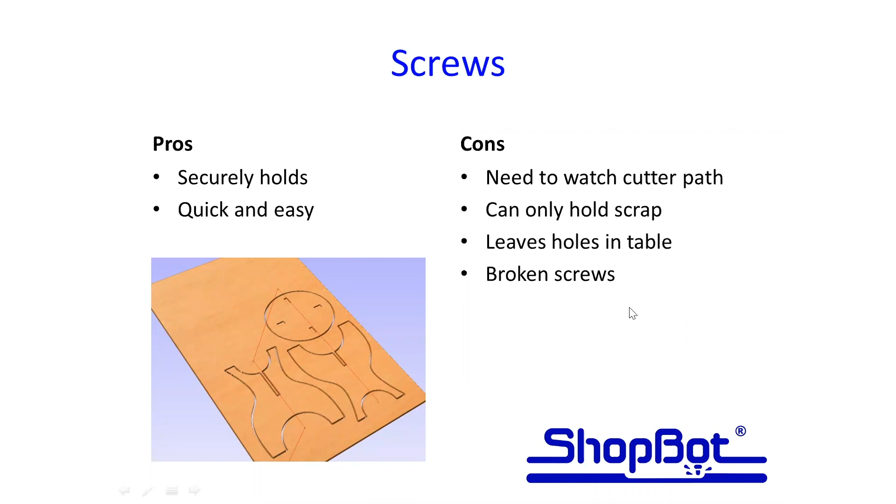So that is screws. Nylon nails - this is one that a lot of people use. I don't like it, a couple reasons. One is I have not had luck with these nails really going through all the way and holding boards in place.

They just kind of bend and compress as they cut in and don't penetrate into the table surface as much as you might think. But if you're cutting material that's suitable for the strength of the nail to hold it down, it's very nice. It holds the boards securely in place, it's very quick and easy, and air is not a problem. It doesn't damage a bit if you do end up putting a nail in the path of the cutter - the cutters are able to just go straight through these without any issue.

Another advantage to this is removing it. Even though I have removing on the cons side, sometimes removing is an issue, but if we use the same method as I showed with the screws - using the CAD/CAM software to place those holes and know exactly where it's okay to put a nail - you could then, after you're all the way done cutting, use the machine in those same hole locations where you put that nail to do a drilling tool path that goes all the way through. Basically you're just drilling that nail completely out.

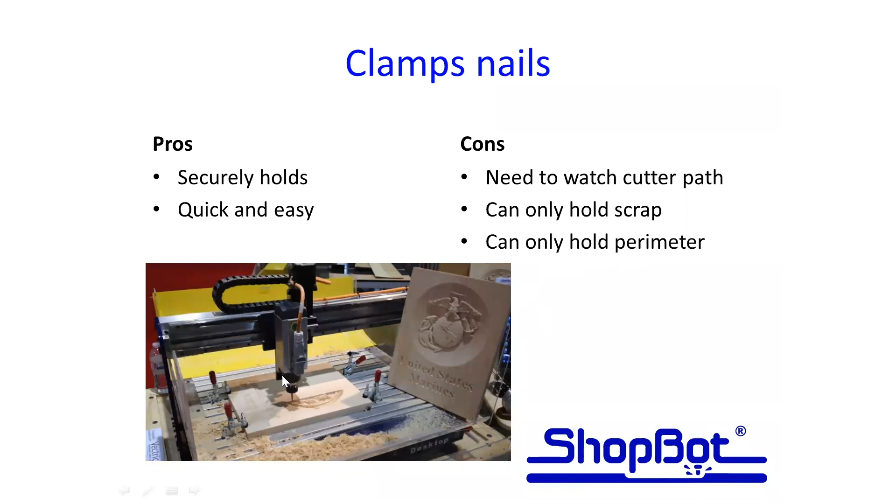You do have to watch the cutter path. Mainly it's off to the side, so X and Y are generally fairly safe since you're not going to necessarily cut that close to the edge. But your Z level - make sure that your Z is up high enough to clear any clamp that you may have on the table. And a big con is it's only able to hold the perimeter of the part and nothing on the interior of the part.

Double-sided tape - this is one that if you've been sitting in on the Wednesday classes, this is one that I also use. Between double-sided tape and screws are my two biggest methods of holding parts in place. The pros is it's holding everything, the scrap and the part itself. It's fairly quick and easy to use. The cutter path isn't really an issue, although when you do cut through double-sided tape, it does kind of make a mess of the bits and gums up the cutter - so that's on the con side.

And you can't really confirm the hold down. So if you have it taped down and your full sheet is there and you press it down and push it, it feels like it's held down, it's not moving, but as you start cutting the parts out you then realize the board was cupped a little bit and it was only stuck on the outside and not on the interior of that part. So that is definitely an issue.

There's also an issue with cutting in double-sided tape of cutting on top of Jello. You have to be careful not to get the tape too thick, which you might think is a good idea to compensate for flatness and such. But once you get it too thick, that tape could vibrate and kind of wiggle and jiggle, which is going to show up in the quality of the cut as well.

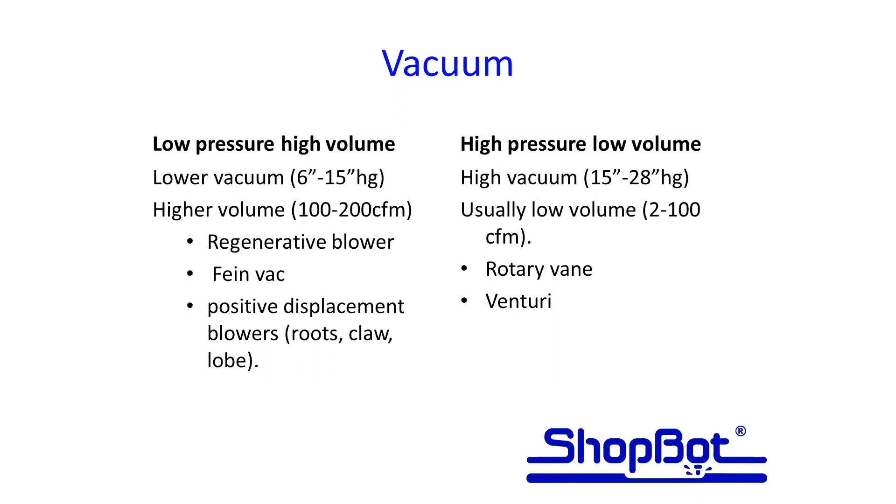You could watch the video of this and dig into it a little bit. Just understand one thing we'll talk about here: what is the pressure, and what is perfect vacuum, and what is it that you want to be able to achieve with this.

Perfect vacuum is 29.921. You're never going to get a vacuum any better than that unless you have your vacuum inside of a pressure chamber that's able to increase the atmospheric pressure. That's also at sea level. And basically you divide that number by 2 to get your pounds per square inch.

And what that is, is a column of air. So one square column of air sitting at sea level all the way up to the outer atmosphere—that column of air is going to weigh 14.7 pounds in that inch. So you could multiply that over a 4x8 table, and you'll find out you could have a couple tons of weight of air pulling down on your material.

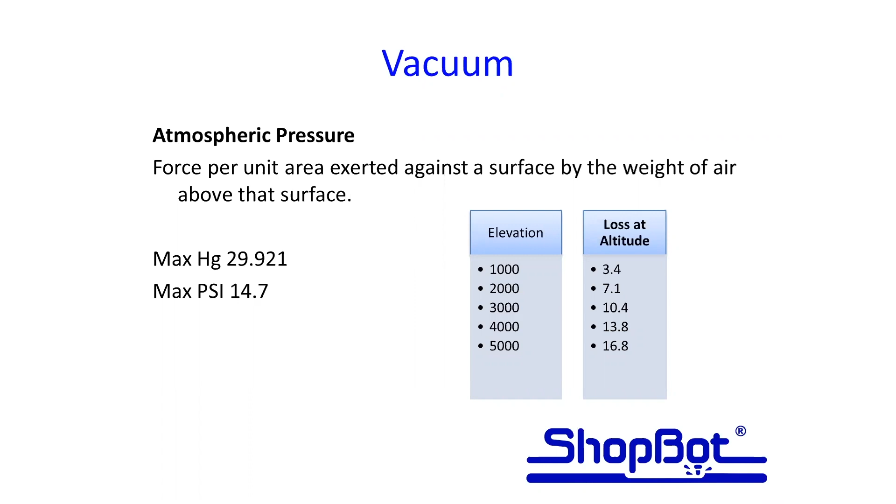So we have a low pressure, high volume system. This is generally like a regenerative blower, shop vac type system, where they're not able to really produce a lot of pressure, but they just move a tremendous amount of air. And that air flowing through here is able to compensate for the lack of pressure.

So the reason I'm pausing a little bit here is I'm looking for a calculator to do a little bit of math. So I'm saying this system is good for a cabinet maker—if you're cutting a 4x8 sheet of plywood, that's a total of 4,608 square inches. A good shop vac, or not even a decent shop vac, is going to be able to get you roughly 5 inches of pressure, so you're going to end up getting about 2.5 pounds per square inch.

So that means if we multiply that 2.5 times the square inches, we have 11,000 pounds of air sitting down on top of that plywood. So even though it's just a small little shop vac, that's a lot of weight we're applying to the top of our material, the top of the 4x8 sheet, which will hold parts in place.

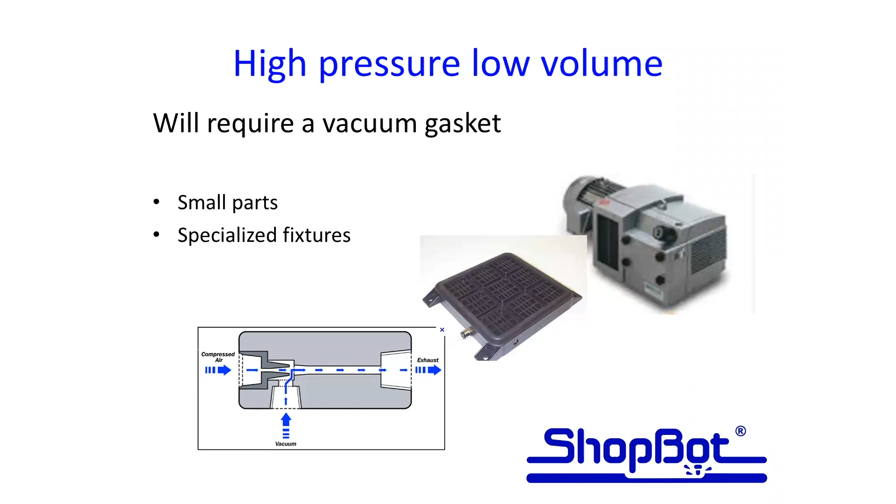But then we also have the larger horsepower rotary vane pumps, like the larger Becker pump, where that's also high pressure—it's able to achieve 25 inches, but we're also up at 150, 200 CFM. So that's like the best of both worlds. But the higher the volume, the higher the pressure, the higher the price. So a good solid rotary vane Becker pump, I believe, costs around $7,000. So there is some of that, but it's a very, very nice pump to use.

So with the vacuum, the pros is it's going to hold it securely and evenly. That's really the most important part and the biggest advantage of vacuum, holding the material, your scrap, and the whole sheet evenly. The hold down is consistent across it, which is going to show up and give you a good quality cut. After I get through this, I'll mention a personal experience failure I had that demonstrates the security of the vacuum.

It's very quick and easy. Just throw your sheet up there, turn the vacuum on, and it's held in place. It can also hold the scrap part, because holding the scrap is something a lot of people tend to forget or not completely understand. It's just as important to hold your scrap material as it is to hold the part you're actually cutting.

Because if you don't worry about holding the scrap, it's going to be bouncing and vibrating around on the outside of your part, which vibrates and bounces into the cutter, which will then resonate into the part you're actually cutting and most concerned about holding down. So holding scrap down is very important to remember.

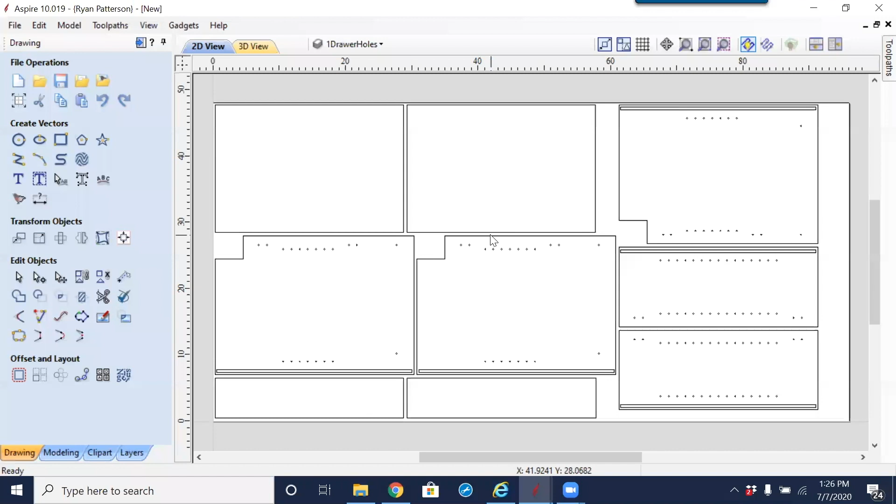So with this scenario here, in cutting order, looking at this I would probably cut 1, 2, in this order. So there's 1, 2, 3, 4, 5. Now these parts here are 6, 7, 8, and 9. We have ways within Vectric to say I want to cut these parts out in the order that I have selected.

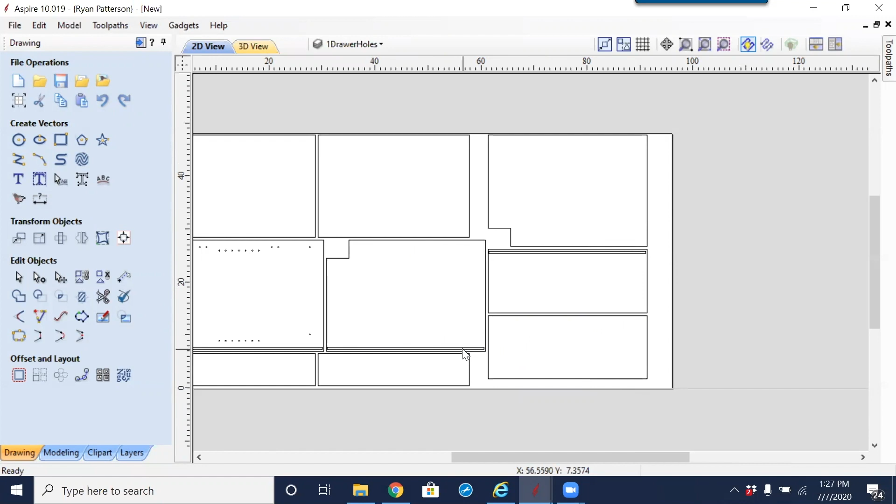Let me clarify and take out some of this noise - I'm just going to select all of the internal features and remove them, because we're really only talking about hold down and methods for being able to perimeter cut without a vacuum. So I've removed everything internal and I'm only going to focus on a profiling toolpath on the outside of the selected lines.

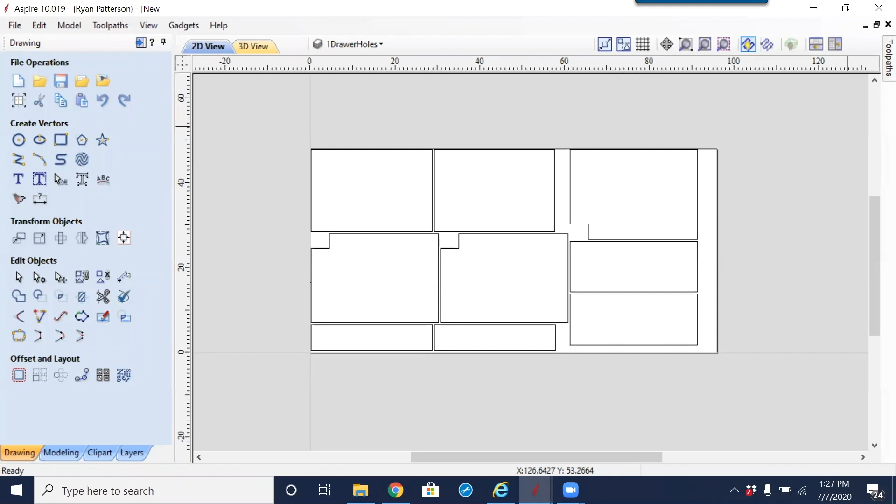Normally we don't worry too much about where the start points or end points are - well, we should worry about what direction they are - but the part order doesn't necessarily need a lot of time. So typically, just select everything, bring up the profile toolpath, give it a depth to cut to, and then specify a cutter, which I don't fully have my database set up for yet.

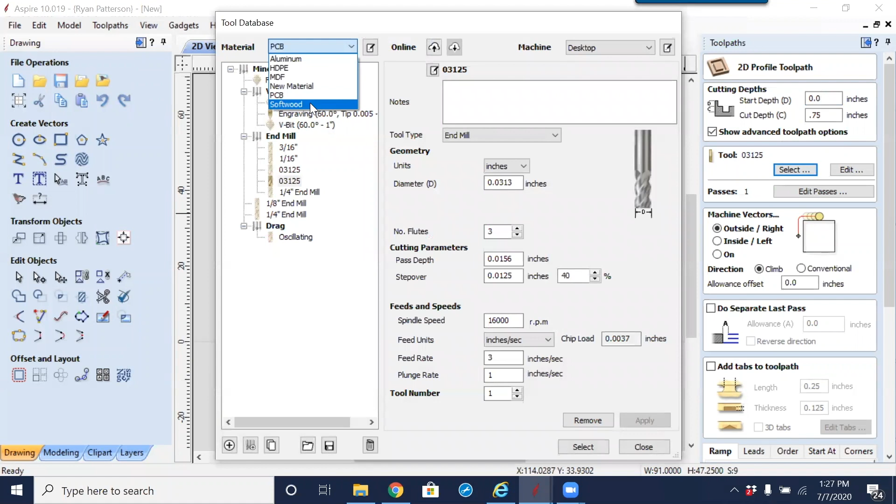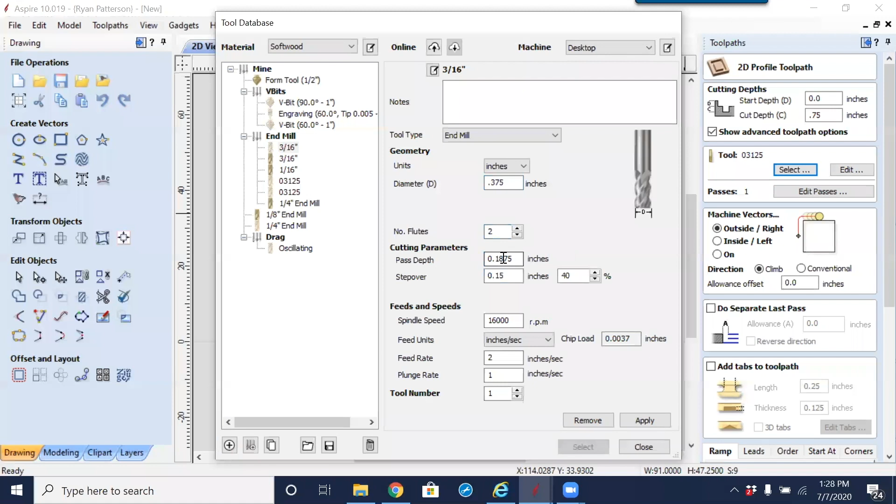Well, let's put a new tool in here. I want an end mill because I need to do it anyway. So bonus, we'll learn and see how to enter in a tool, although I'm not going to speak too much on the settings here. We'll see that as you move along.

I'm setting the material to softwood, which would be like plywood. So I'm entering in the numbers and values that I would use for cutting plywood.

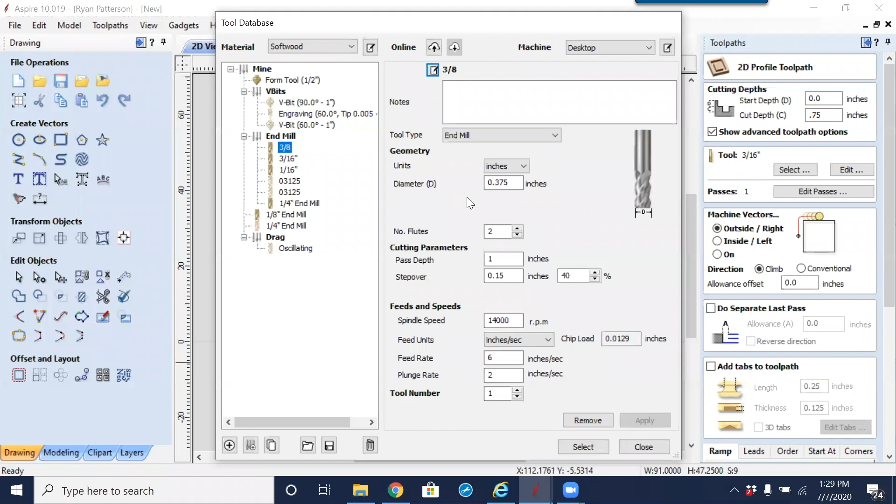Oh, look at that, I messed up. I'm going to select that again. It is in there, but it is not a 3/16 inch bit. I want to edit that and change it to 3/8, so the description actually matches what it is.

Cutting on the outside, I'm not going to worry too much about any of this just yet. I'm just going to come down and hit calculate and see how the path looks.

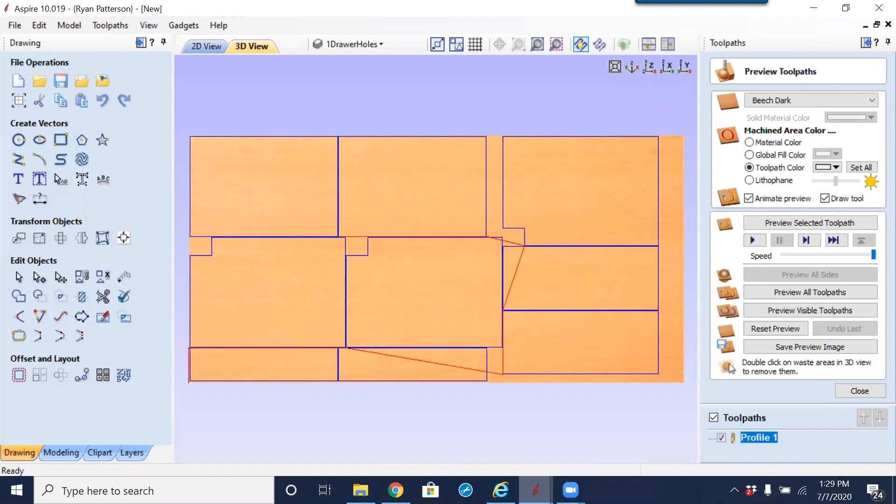So yeah, sorry, I should have mentioned this. There was a question about the vacuum hold down being able to bleed through MDF, since it's a porous material.

I didn't believe it, so I actually called ShopBot - this was 15, 18 years ago - and asked why they wanted me to cover up all this hard work I just did. They explained that MDF is porous and it'll bleed through. I said alright, I'll try it, and sure enough it did. At that time I was just using a shop vac, so even a small shop vac or powered machine is still strong enough to bleed through and pull through MDF. So yes, it definitely can be done, and that's the way it's done.

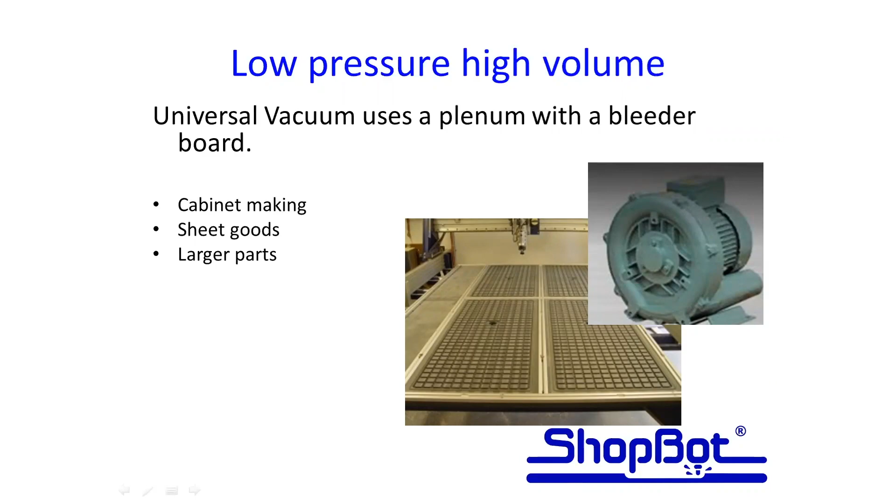Actually, cutting on top of a waffle iron grid like this hurts you in a vacuum. A lot of people think you get a better hold down if you just threw your board right down on top of this, but when you cut all the way through, you cut into that grid a little bit. You could always fix that, but what it really does is allow more of a leak and a more direct flow, so you can't build up even pressure across the table - you lose all the vacuum and airflow through that one spot. So yeah, it definitely bleeds through the MDF.

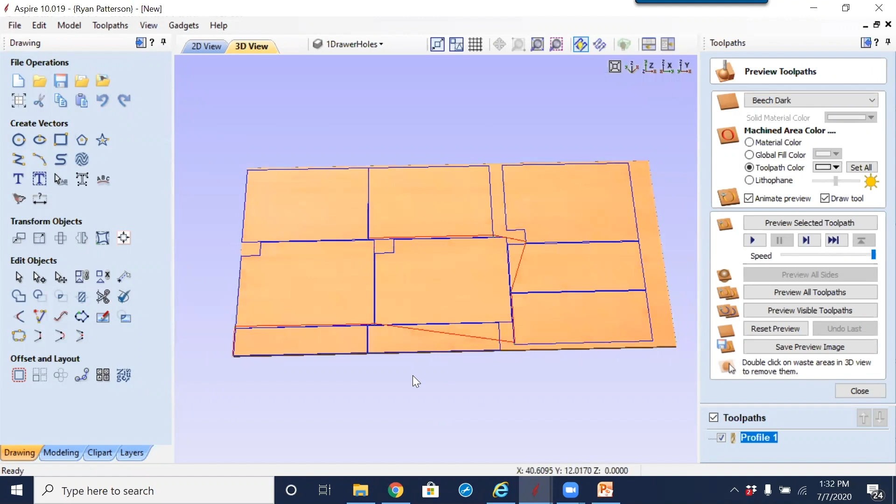So I'm going to take a look and rotate this around and follow how the cutting is. It kind of looks like it's cutting in a decent pattern that I would already want. This was an imported drawing from another software, and it looks like it did a decent job of putting the start points right where they should be, except for this one right here.

I don't like the location of that, so I'm going to explain what I'm talking about here. Coming over to the 2D view, I'm going to uncheck this and look at the strategy or the path here.

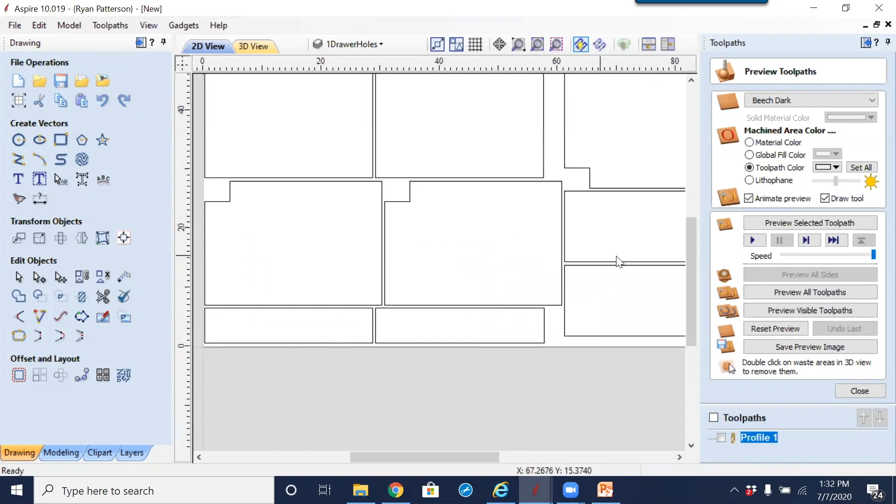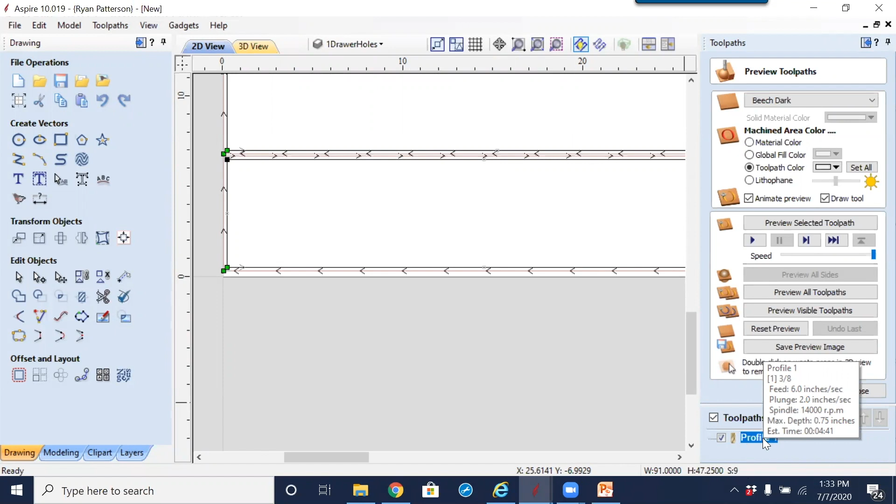If I select everything and type the letter N, node editing is turned on. And actually, it's not good at all - we are cutting in a conventional direction, and we can see that by what this arrow is pointing to right here. That is... oh, I lied, that's a climb direction, which is not good for plywood. So I'm going to double click the profile here and change the direction to conventional.

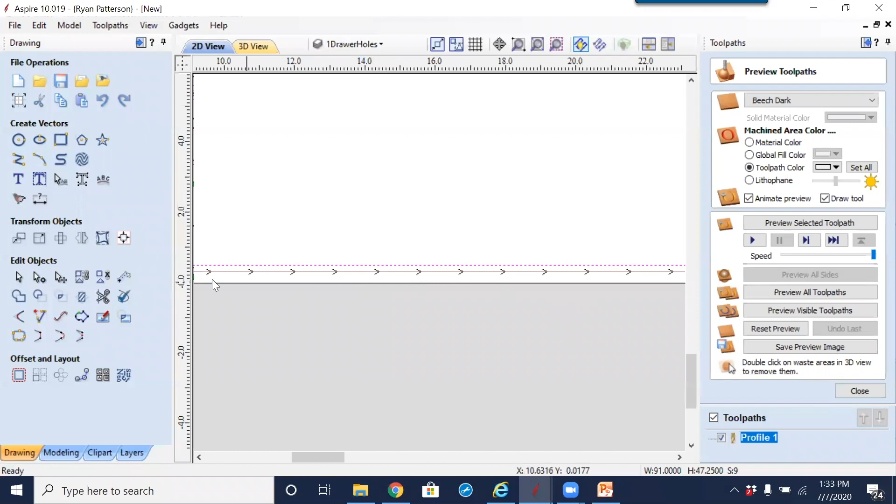Select recalculate, and again coming over to the 2D view, the arrows here are showing the direction of the cutter - it's going from left to right around the outside of this part. Now imagine if we're cutting this part with solid hold down across the whole sheet, as we hopefully just learned - there's a lot of weight sitting on top of this board. But if we start cutting right here at the lower left and work its way up and over, when it gets to this point, we still have some cutting to do from this point down.

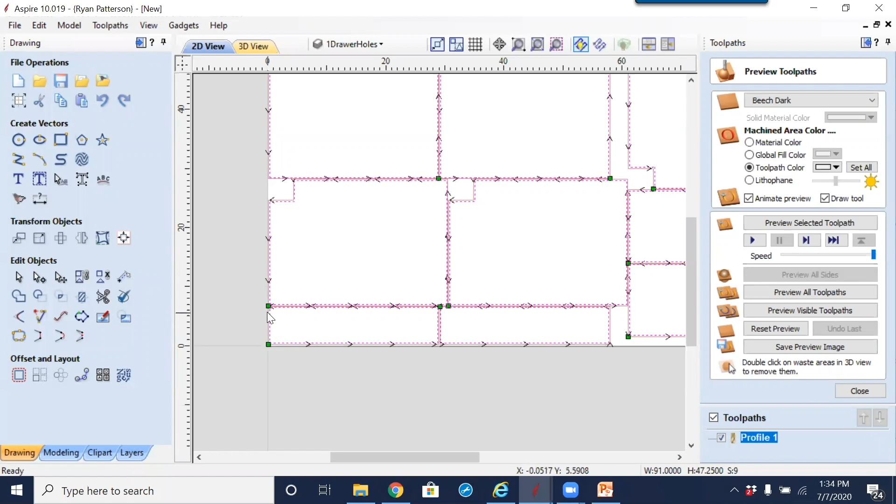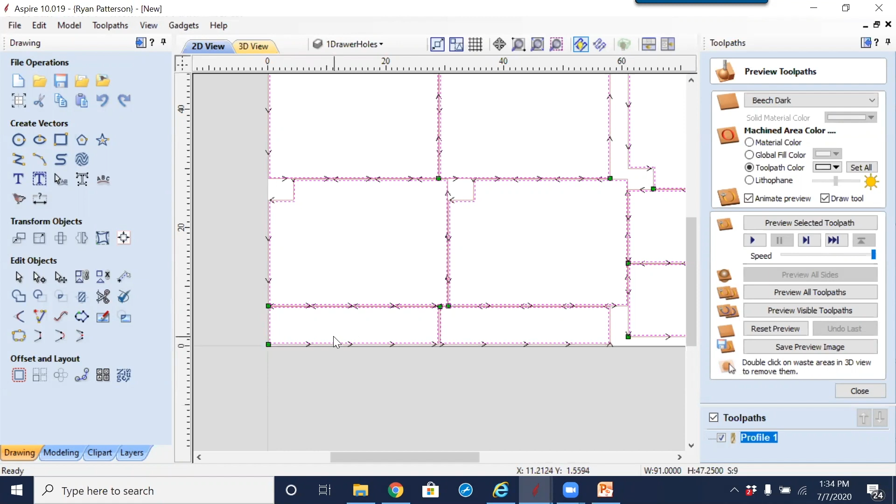Well, now at this point, there is nothing holding. We've completely disconnected this part from the rest of the sheet. So there's a very strong possibility that this part is going to shift as it's making a 3/4 inch single pass down through this area. Vacuum will probably not hold that part in place by itself.

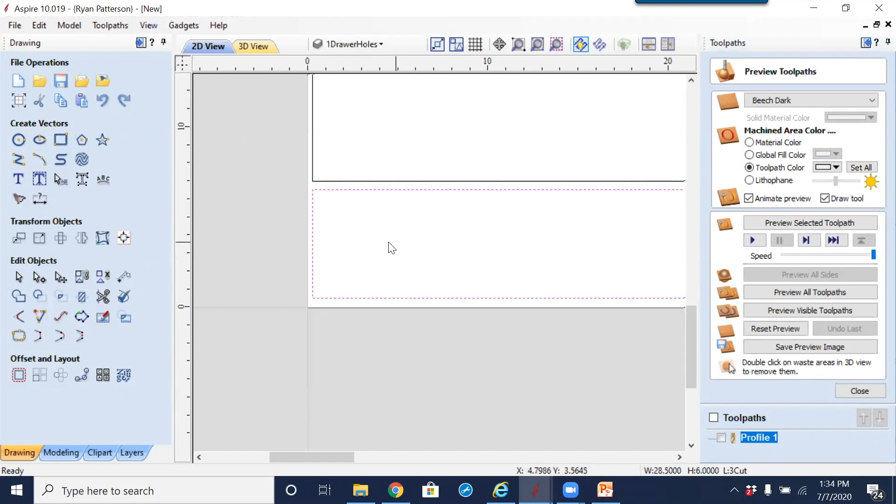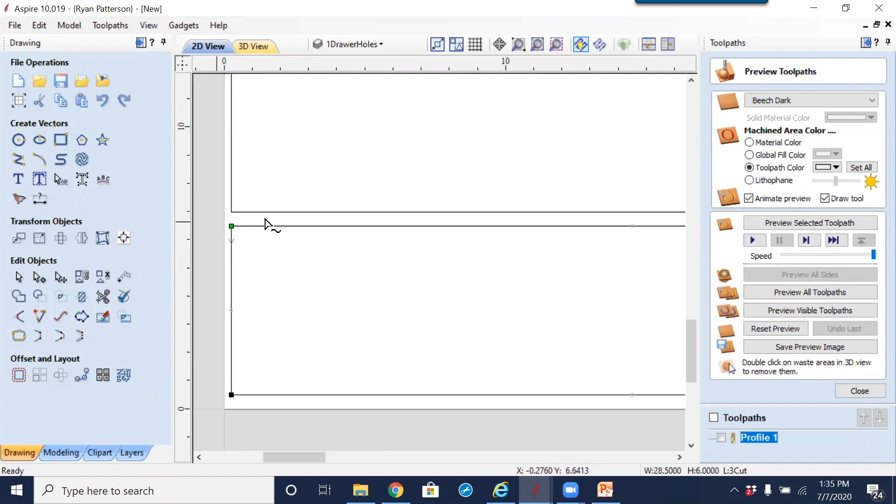But if we change the start point from this lower left corner and move it to the top left, we'll probably be all right with this one, because now I'm going to node edit this one here. As it's cutting here, over, up, and as it's coming across here, this part is still connected to the larger part of the material, so it can't move. The only time it could possibly move is when it makes this final connection back to the start point.

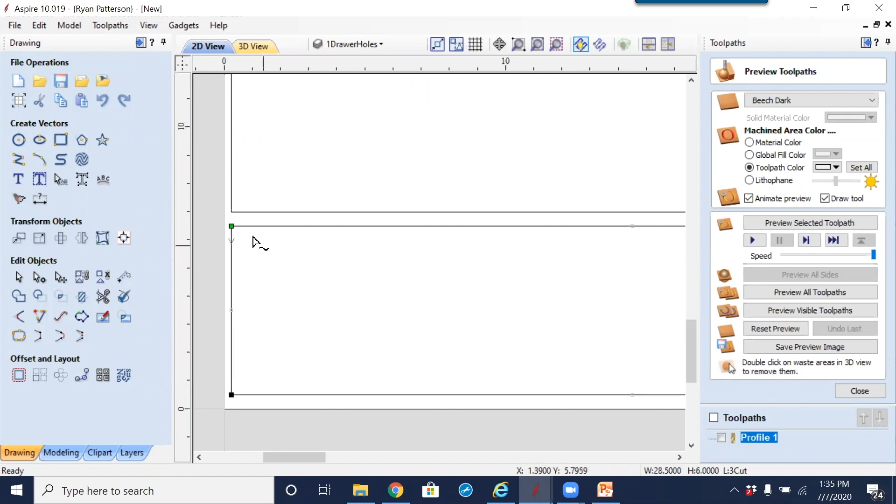What would happen is it's not going to get kicked off the table. It's not going to go flying across the shop. It just kind of gets a little bit of a shift, bounces off a little bit, which may end up leaving a little bit of a radiused end right there, but we're moving fairly quickly through this material. So even if it does kick off to the side a little bit, it's probably not doing any great damage to the part. If anything, we're leaving a little bit extra material there that could be sanded off.

So I'm just going to go through a couple of these other parts, selecting them individually one by one and changing the start point. I'm changing the start point by hovering my mouse over top of where I would like to have that start point be and selecting the letter P.

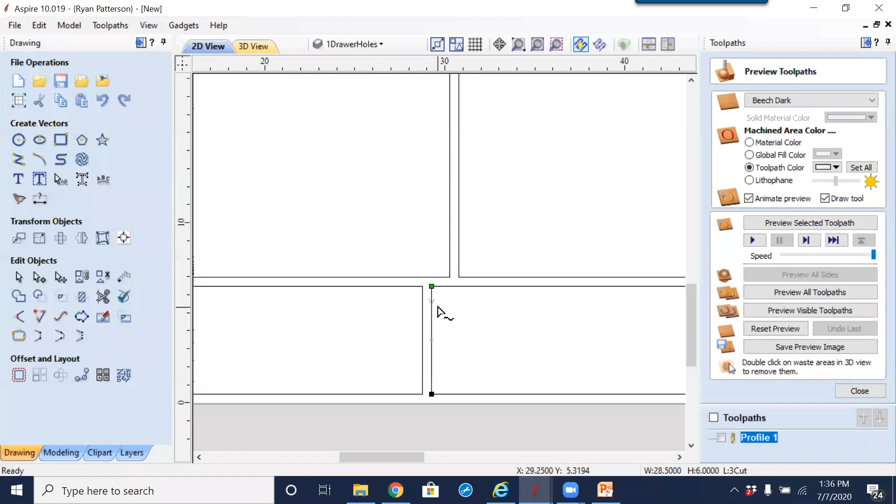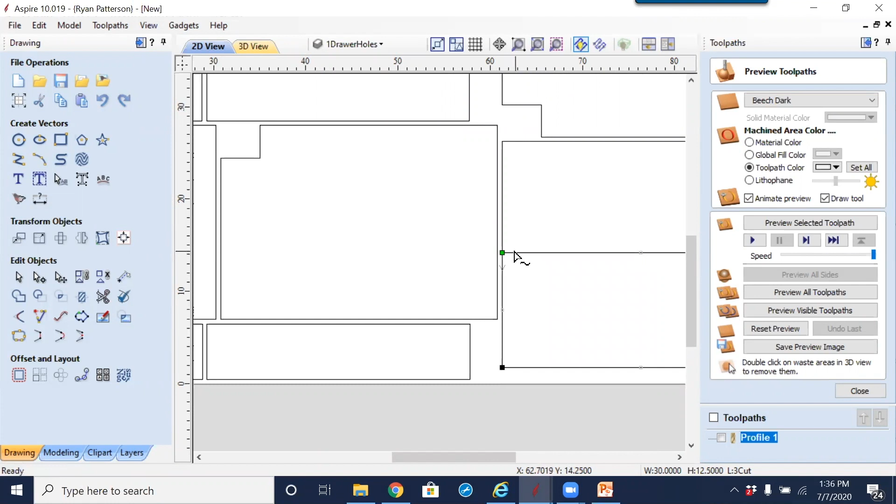I'm going to go through the process in the order that I would want to have them cut. And I know it was the letter P for that start point simply because right-clicking and saying make start point, you see this letter P right there. So that is saying that that's a shortcut to that letter or to that command.

So knowing the shortcuts really are going to speed this up a little bit.

Now this part here, even though so far I've been going to the upper left, this part I'm going to go to this lower left point right there. Same scenario - it's starting here, working its way around, up, over, and as it's coming down here, it's not completely releasing its hold down or its attachment to the rest of the sheet, which still has a very solid amount of surface that that vacuum is holding in place. So we're probably good with that one.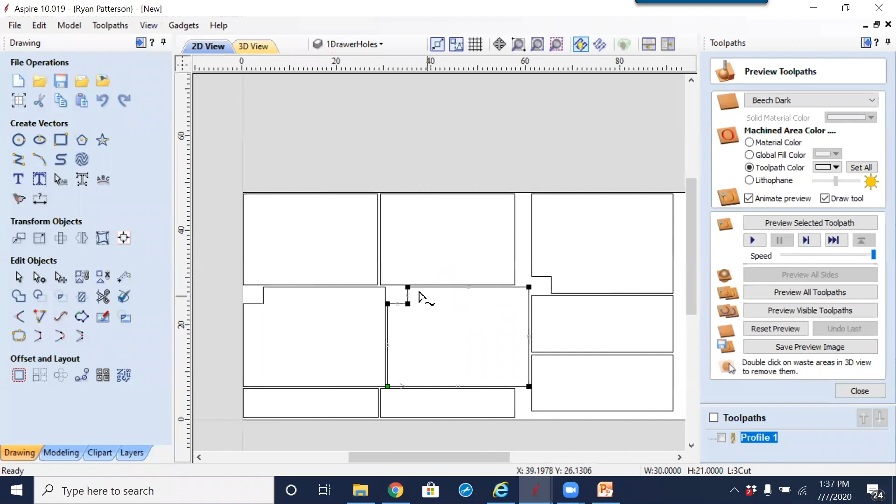Again, just coming down here, changing the start points on these parts. And again, well, look at that - that one's already right where I would want it because it's going to come across, up, over, and down.

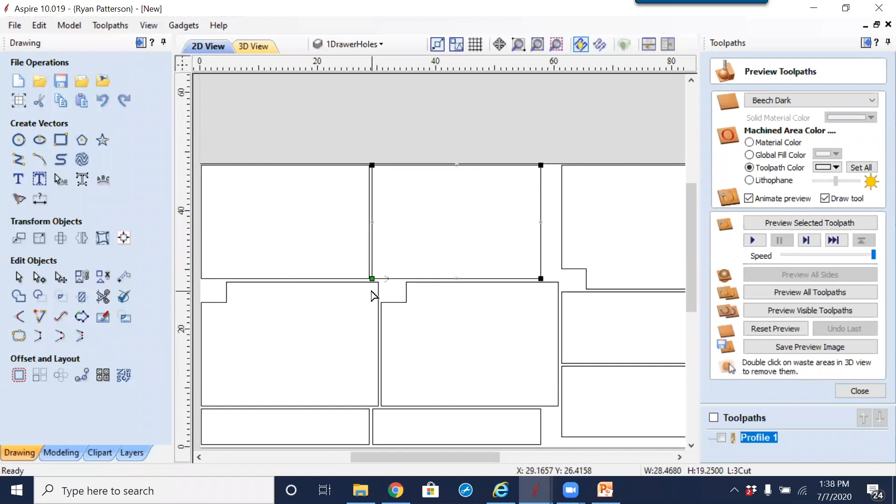This last part really doesn't matter, it's probably just as fine there as it is over here because everything is already removed from it. But I will change it to the lower right only because this part is at the lower left. So it's up, over, down, and saves the machine from a little extra travel, which is going to be a little bit more efficient on your cutting speeds and getting the job done.

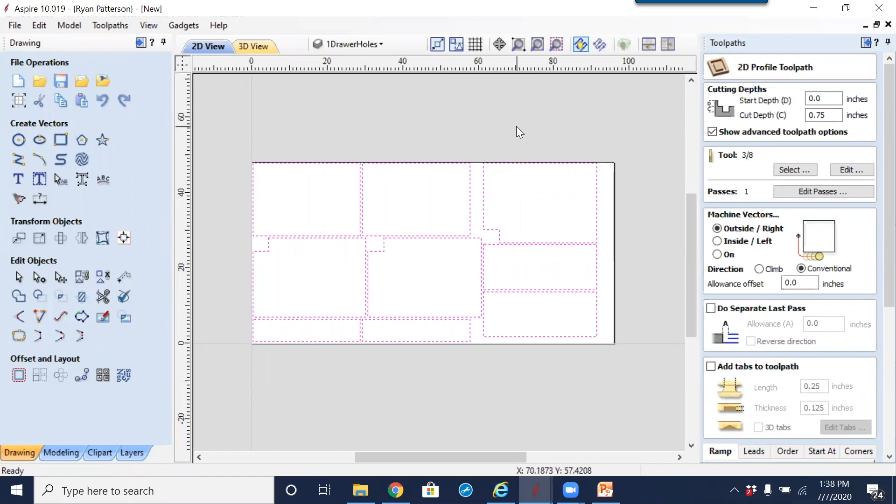So now with the start points changed, I'm going to take a look at the features or the settings within the profile toolpath itself. I'm going to double click. I'm going to deselect simply by clicking off of all parts. And I'm going to take a look at some of what we have.

First, you will want to have the show advanced toolpath options checked, because what we see is only going to be available with the advanced features, and that gives us a secondary tab down here. I'm going to look at the start at, and first we want to keep the current start points - all of those points that we just made, that's what I want to have. The order...

I'm going to uncheck everything here and check the box. It says vector selection order. So that means that whatever part I click on first or select first is going to get cut first. So I'm not going to do a sweep select - instead, holding the shift key down, selecting the parts in the order that I would like to have them cut.

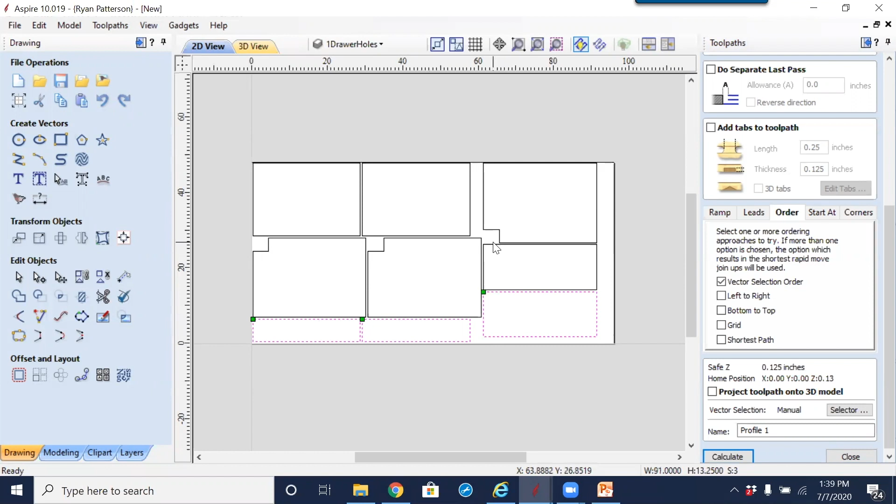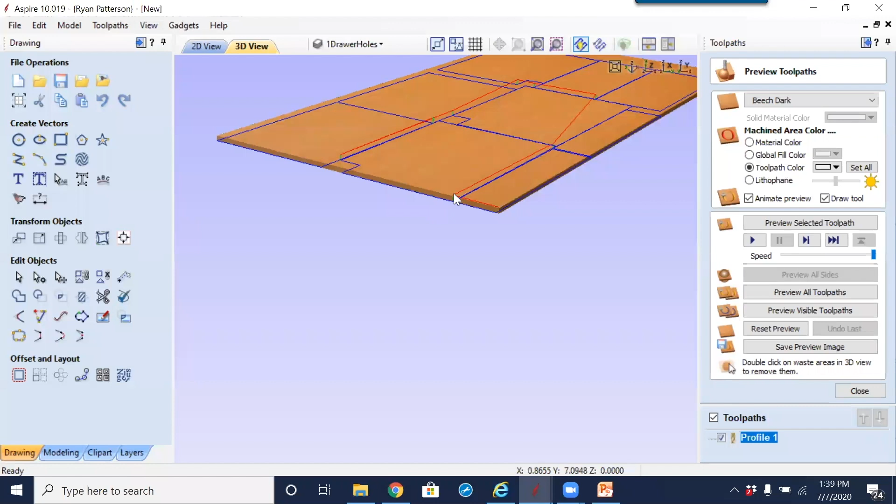With that complete, selecting calculate, we can now see that the plunge points are right where we set them, and the pattern of cutting is going in the order that we have selected the parts. So even if you don't have a large vacuum system, I would very confidently be able to cut this sheet of plywood by going through the strategy that we just did.

I would very confidently be able to hold those down with a basic shop vac from one of the hardware stores. You will eventually burn up that shop vac because that type of vacuum is not designed to have airflow completely blocked off. But for 50 bucks, you could really set up a nice vacuum table, and that 50 bucks shop vac may only last you 1-2 months, maybe 3 months for the price.

It's an awesome hold down, and you will be able to hold them down in place with something like we just showed. And that's all cutting in a single pass without any issue.

Now, there is a case where that last part that we cut, if you are at all concerned about this part being held down with the vacuum, where these two parts alone, I am not certain a shop vac style vacuum table would be strong enough to hold that down.

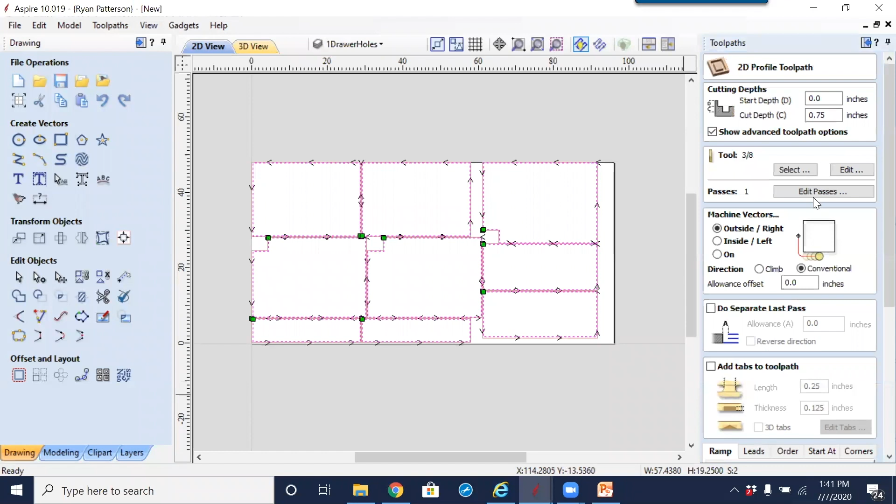This is where we could add the advantage or the strategy of onion skinning. So far through all of these parts that we just cut, we cut at a full depth all the way through, should really be at 0.76 or 0.77 there. This time, I'm going to deselect these two parts right here.

And come down and calculate. So they are still cutting in the same strategy in the start points there, but now I'm leaving this open to be able to take a different strategy on these last two parts, because if you are concerned that you've seen this part slide and move around a little bit, so you want a little bit more surface area.

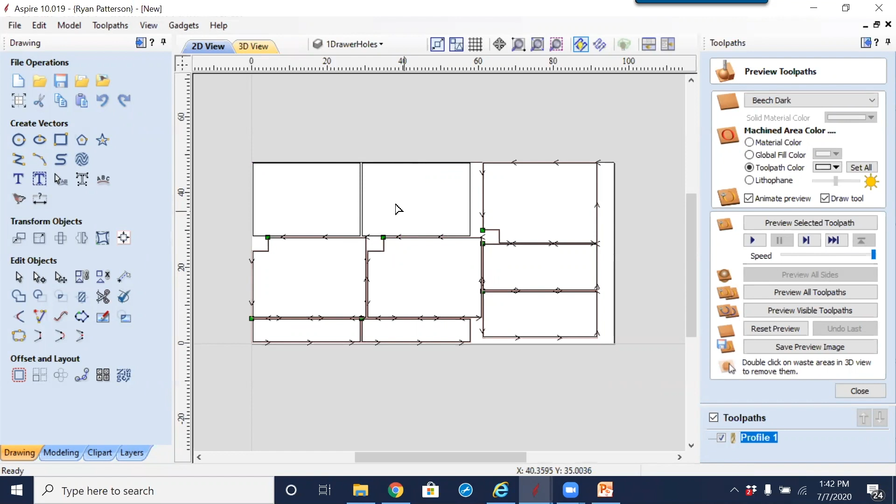The strategy we're going to use here is a combination of what we just did, still going with those start points, keeping where they are, and also the cutting order. So this one first, then this one. I'm going to do a profile toolpath, this time going almost all the way through, not all the way through, but almost. So let's go 0.73 there.

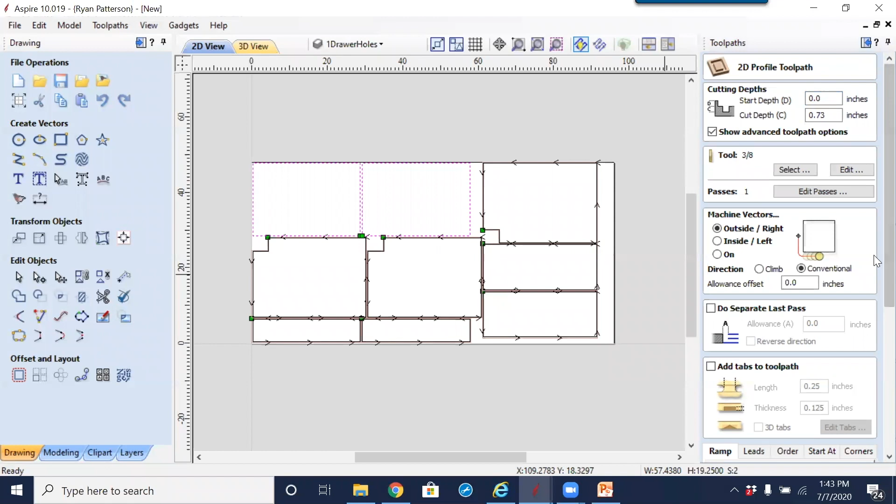Still 3/8 cutter, I'm just going to do that in a single pass on the outside and come straight down to the bottom, making sure that our keep start points is there and our vector selection order is good. Selecting calculate. So I'm going to preview what this looks like.

So you can see all of these parts here are cut all the way through, but these ones are not. So since we did not cut all the way through, we still have a very solid vacuum hold down across the surface of both of these parts.

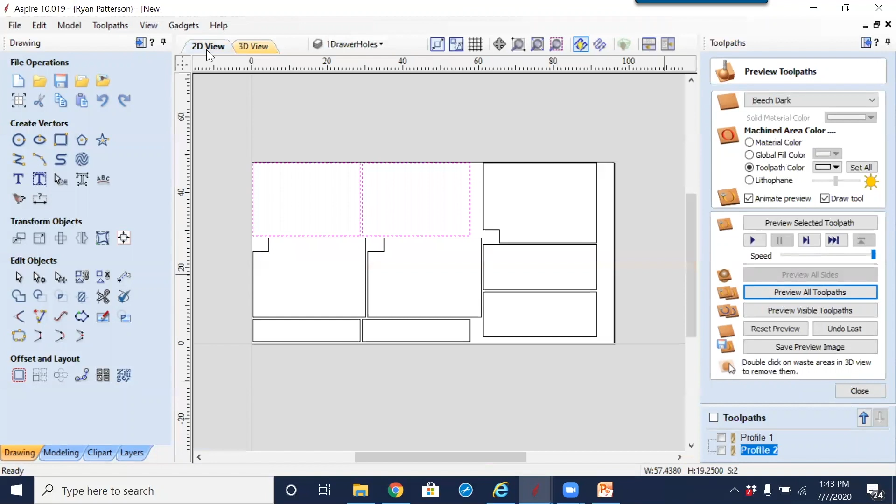Now what I would do is make a duplicate of that toolpath. This one right here is cutting those two. Go right click and duplicate, modifying only that toolpath.

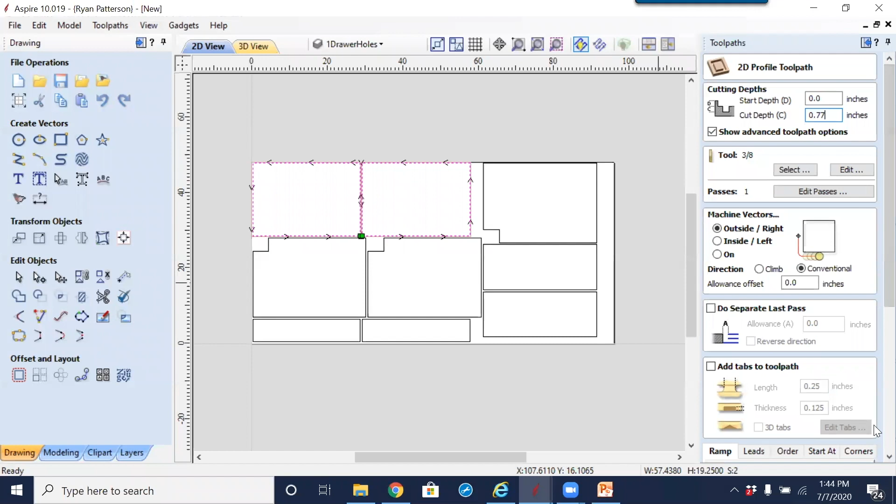And this time I'm going to say, I am going to cut all the way through at 0.77, same bit, still a single pass all the way through, cutting on the outside, same strategy as before, and selecting calculate. So now what that is done is we've removed most of the material with that first pass.

And left just that thin material there that's still keeping the vacuum underneath of both of these parts. Then we come through and remove that onion skin, which at this point now there's very little force being applied to our parts, so the hold down does not have to be as strong.

And removing just, we left a 32nd of an inch or 1/16 of an inch of material there to cut through, and gravity alone or the weight of those parts may even be enough to hold it in place. So it really wouldn't take a tremendous amount of hold down to be removing just that 1/16 inch onion skin of the plywood.

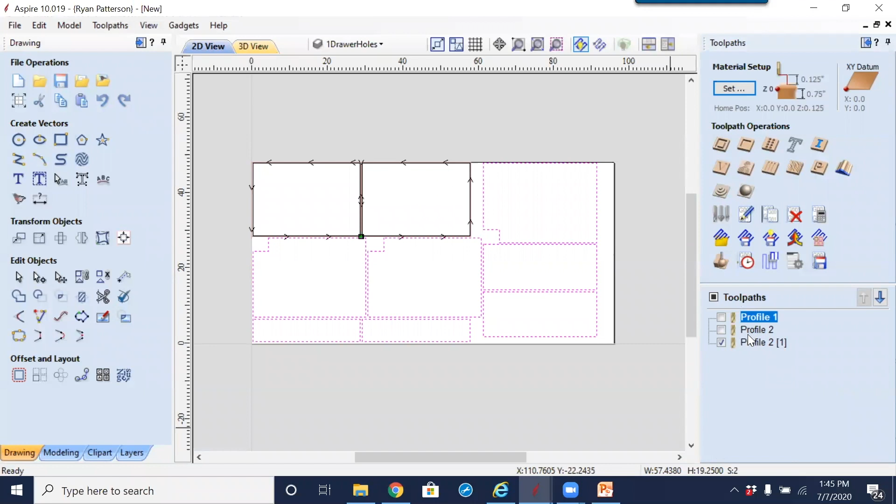Could do that same method across the whole sheet if you really were concerned about doing that. So we could just right click and remove or delete, not all, delete that one and delete this one.

So now we're still back to this one, double clicking the toolpath, selecting the other two parts. I'm going to change the pass depth to this to be 0.73. We'll calculate.

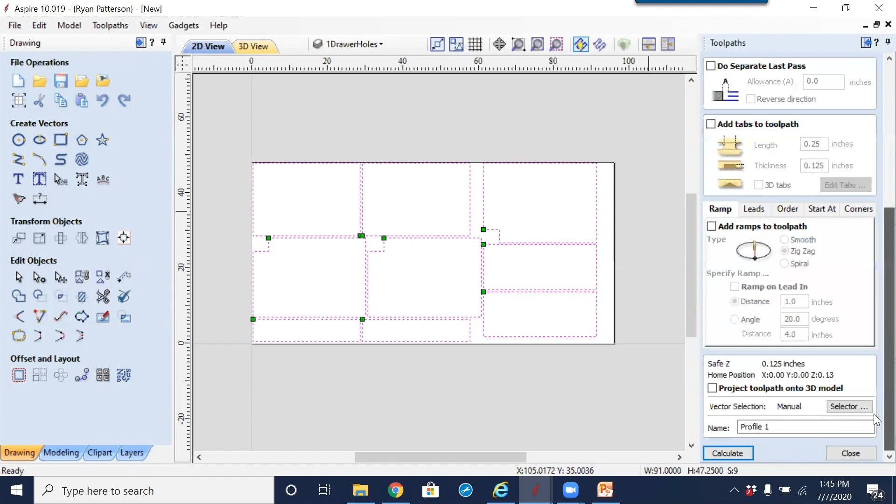I'll reset, so we cut this completely around, almost all the way through, leaving an onion skin. Then we'll make a duplicate copy of that part.

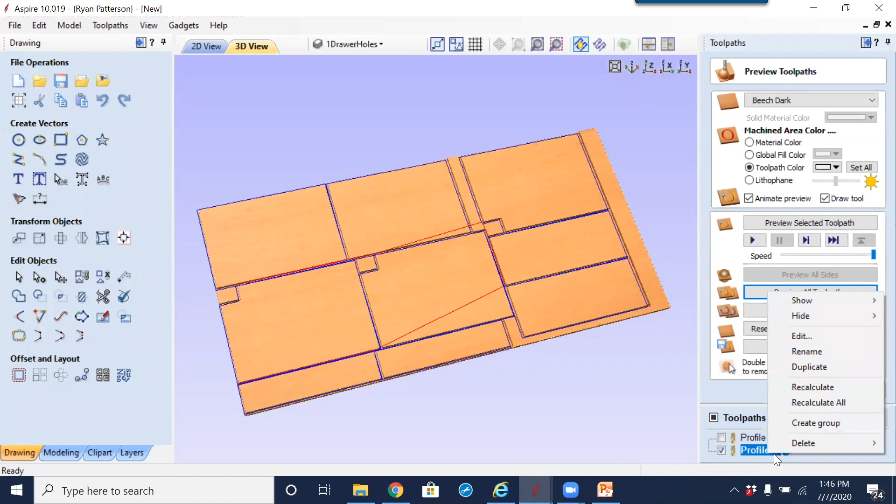We're modifying this one to cut all the way through this time, removing that onion skin, and selecting calculate. So it will cut almost all the way through with the first toolpath we created, then the second one will come through and remove that onion skinning.

I did want to talk a little bit about nesting and what nesting is. Nesting is optimizing parts to fit as many as possible on one sheet of material. There are videos on this already, so we're not going to get into a big discussion now, maybe another session specifically on nesting, but I believe it's fairly straightforward.

One thing I do want to mention is computers are not the best at thinking. They do not think, they only do what we ask them to do. For the most part, if you had time to manually lay these parts in place, you as a human could most likely lay them out with far less waste than a computer. But it's going to take you a lot longer to nest them than the computer would.

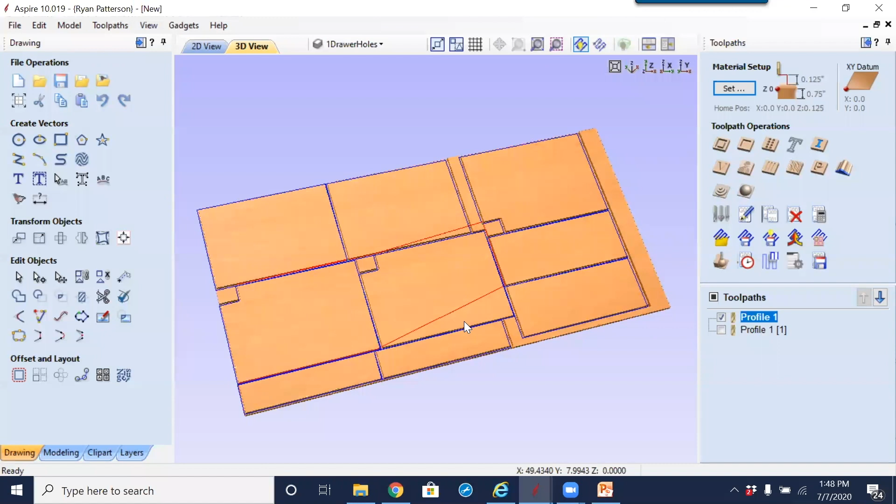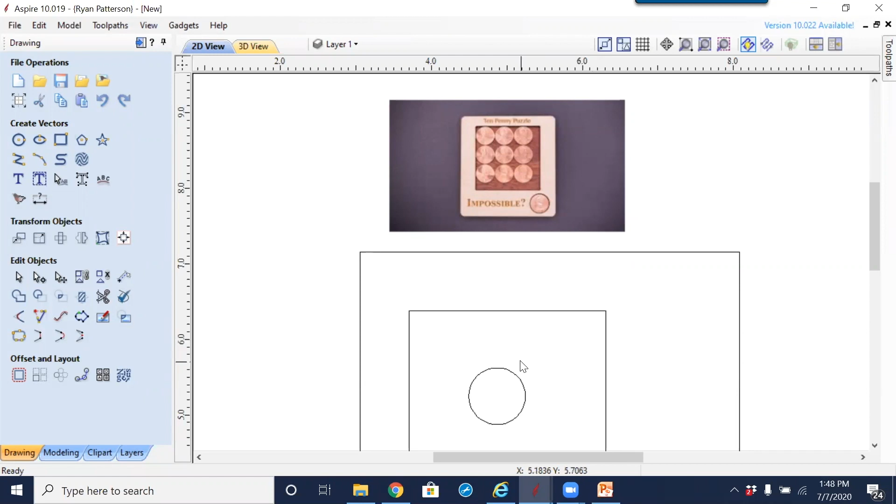A few weeks ago, a month or so back, I posted this project on a Facebook group, you may have seen it. It's a little penny puzzle that illustrates the way nesting could work. The idea is you have a pocketed-out square of material and a total of 10 pennies. 9 pennies easily fit within this area. The goal of the puzzle is to get all 10 pennies to fit within this rectangle. I'm showing this because I think it's a good example of how and why computers may not nest as well as we can.

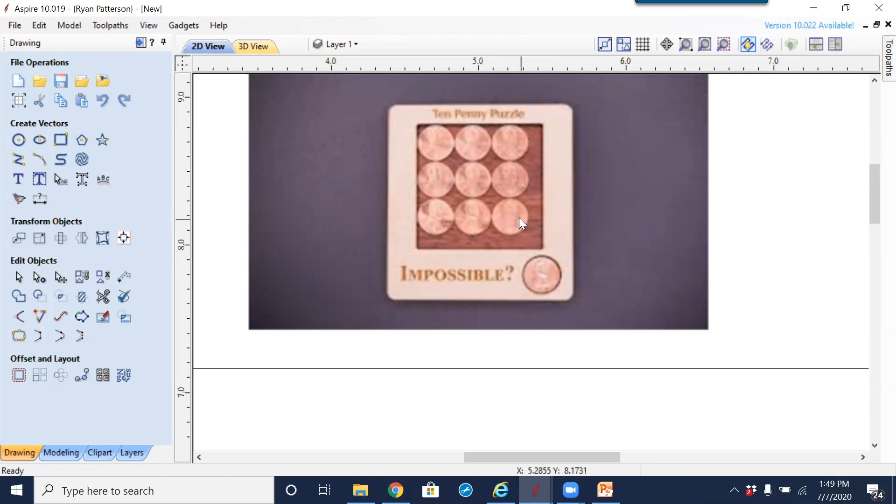It is possible. I won't give the solution away, it's not here, but it's definitely possible, I've done it. Again, it's a pretty good example.

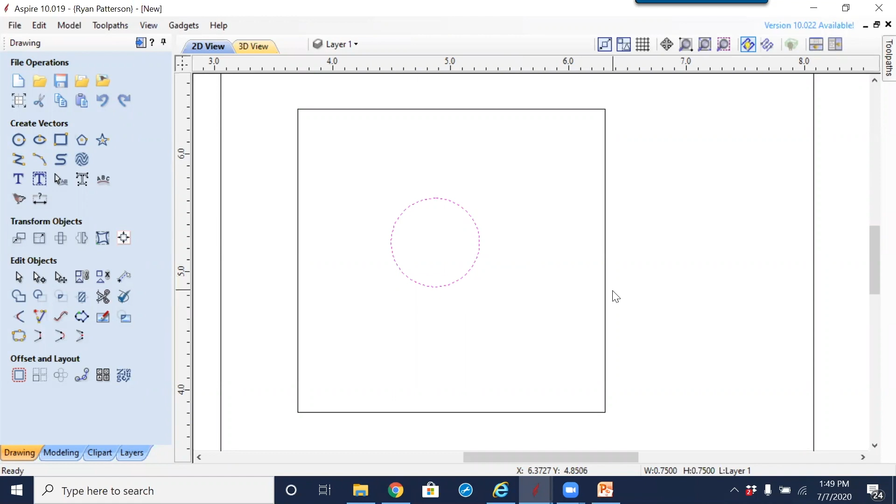I can't remember exactly which Facebook, one of the ShopBot Facebooks, it's up there. I just had to recreate the basic penny setup since I couldn't find my original, but I believe a penny is 3/4 of an inch in diameter, and the outer square I have here is 2.6.

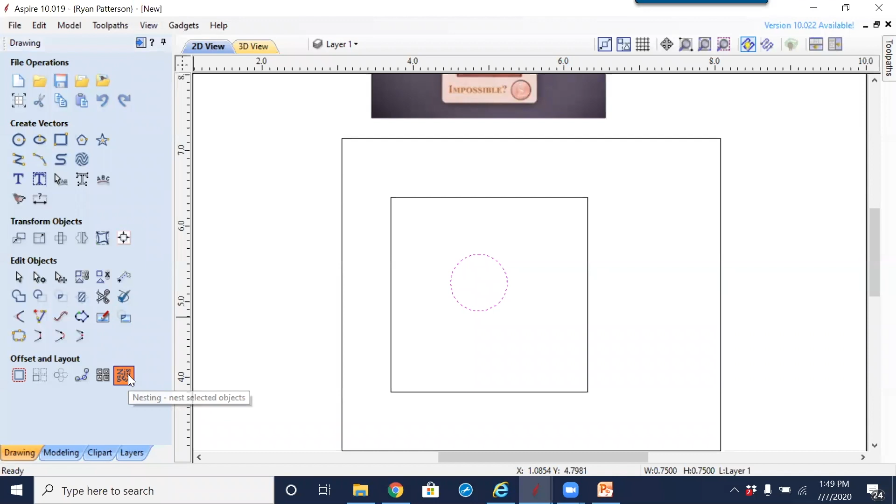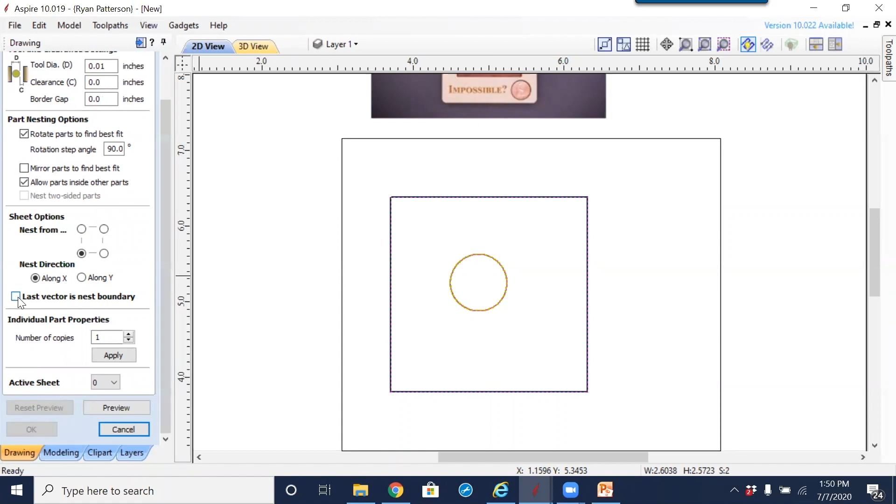So I'm going to attempt to have the computer nest this. We select the penny, then go to the nesting offset and layouts under nesting. I've already made the number of copies, selecting the penny and telling it I want 10 of these pieces, and also telling it I want it to fit within this vector here, by setting this checkbox. So it will attempt to place 10 pennies within this square.

Let's preview what this looks like. It only fit 9 and put 1 off on another sheet. Even with everything set to nearly 0, let's try 1/1000th of an inch to see if that changes anything. It's still the same, the computer just can't figure out how to optimize getting all 10 pennies within that little rectangle.

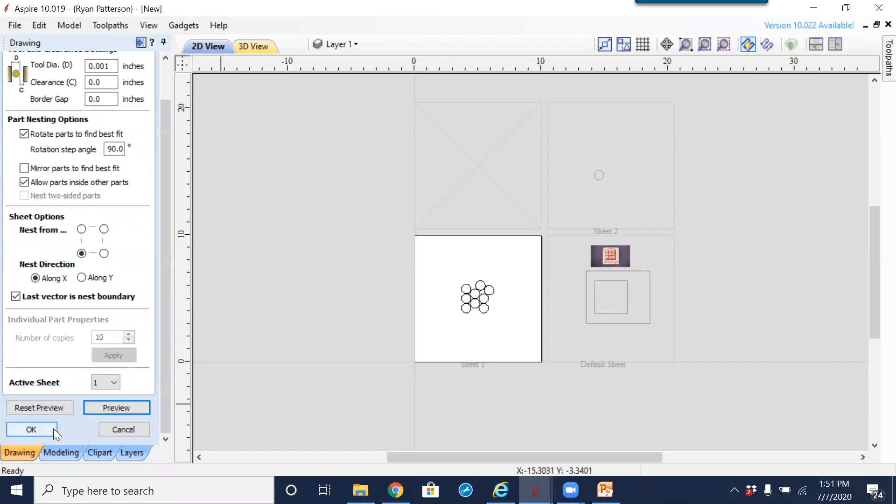I'm not going to give away the solution because some of you may want to cut this puzzle and give it a go yourselves. You can even solve the puzzle by making duplicate copies of this and moving them around. But you'll have to take my word for it until you solve it yourself, that it is possible to get all 10 pennies to fit within that rectangle when laid out right.

I just think that's a good example of the difference between what we as humans can do and what computer nesting is capable of. The computer is certainly going to do that a lot faster than we can. You could spend easily half an hour trying to solve this puzzle, where in just a fraction of a second the computer did it for us.